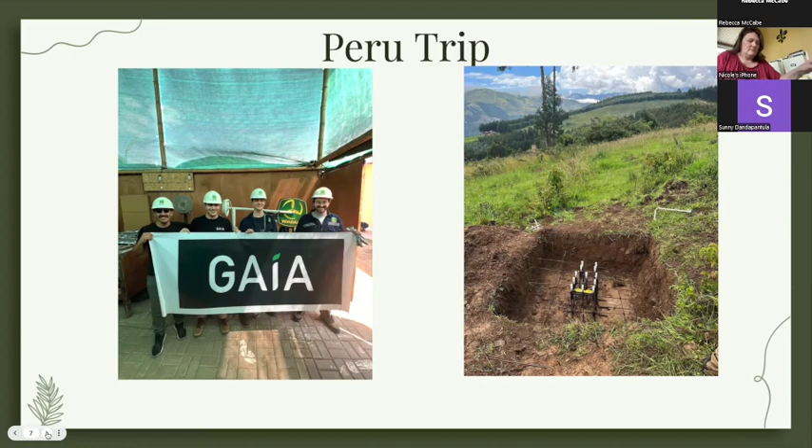And now we have reached today. We're at our first scaled in-person demo day. This has been a long time coming for us organizers, and we could not be more thrilled to be here today. Thank you to the GAIA organizers who made this possible, the ELP team of Miriam, Rob, and Erica, and of course, the competitors. We're so excited to hear about the solution you've created for this year's problem statement. That's it.

Okay. I think yours, because you have the rest of the stuff, I would say. Did you use this one at all, or is it just this one? Okay.

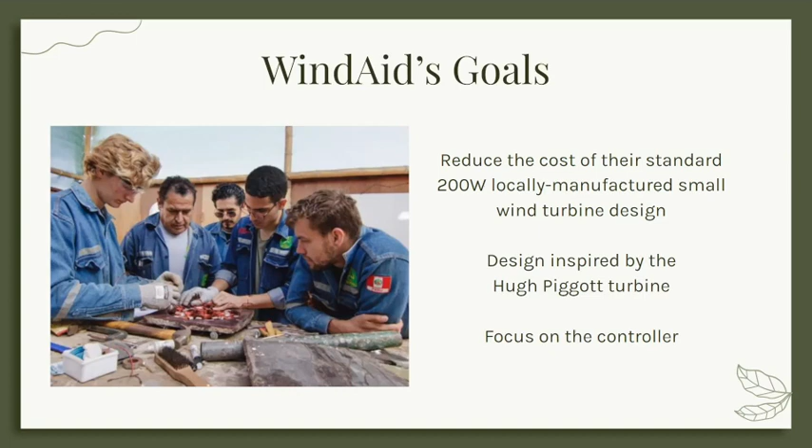They currently import their controller from a company in China, and the controller itself costs $100, but there's an additional $200 of shipping and tariffs and import taxes on that. That's a pretty major part of the overall turbine cost, and that is why the problem statement this year is focusing on how we can reduce the cost of the controller.

Diving into the problem statement, this is a document that the GAIA technical team creates each year to guide the competitors who are entering, with engineering functional requirements, design requirements, optimization objectives, and a wealth of technical resources and information. We created the objectives working closely with WindAid about what would be most impactful for them.

That is why the emphasis is more on cost reduction than it is on power improvement, because there is not going to be that much benefit to a small amount of power increase, whereas there would be a lot more benefit to cost reduction, because it would enable WindAid to make more turbines and give more people access to electricity who do not have it.

The requirements are derived both from physical constraints regarding the governing laws of all the subsystems, as well as the operational constraints and the operating environment — the operating environment of Peru in an outdoors location and needing to survive for many years.

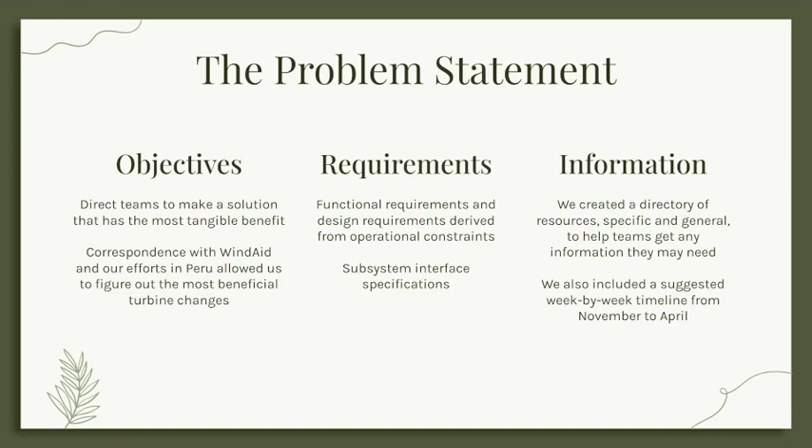The requirements also specify subsystem interfaces between the different components. Finally, the problem statement contains a compendium of resources intended to help teams get started, both introductory and complex and detailed technical modeling. We also included a week-by-week timeline.

This is a screenshot of the part of the design requirements portion of our problem statement. You can see that the electronic system was required because it was the main focus of WindAid for cost reduction, with optional subsystems of the blades and the generator, and several representative design and functional requirements.

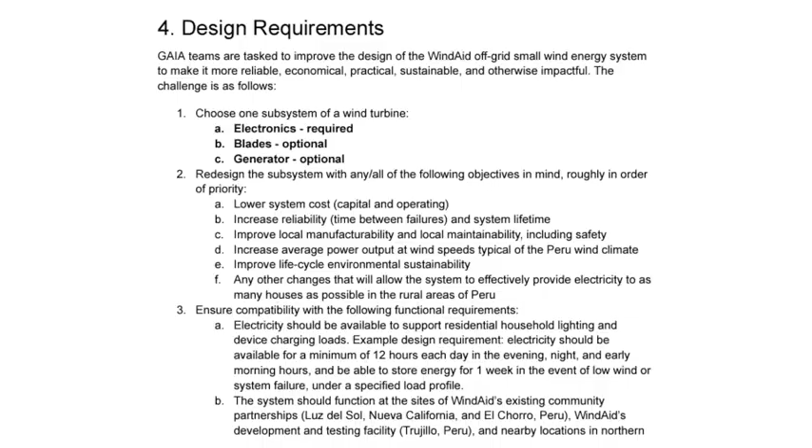This problem statement represents phase 1 of the entire GAIA program. The GAIA program has 3 total phases. This first phase is the prototype phase—a design, prototype, and test phase running through the school year, basically from September, culminating in this event in April, with the goal of innovating on the design, exploring, and testing the proof of concept.

The second phase is the pilot phase, or the implementation phase. This happens in the summer, and you'll hear more about that later on. This summer in August will be the implementation phase, where the entrants actually travel to Peru and implement their design.

The third phase of GAIA, which we have not yet realized with this inaugural cohort but where we eventually hope to get to, is scale—where year after year, the engineers can iterate on their design with continuous improvement, do monitoring and maintenance work of the turbine, and most importantly, scale the solution to have a broader reach and ultimately produce more impact, which is what GAIA is all about.

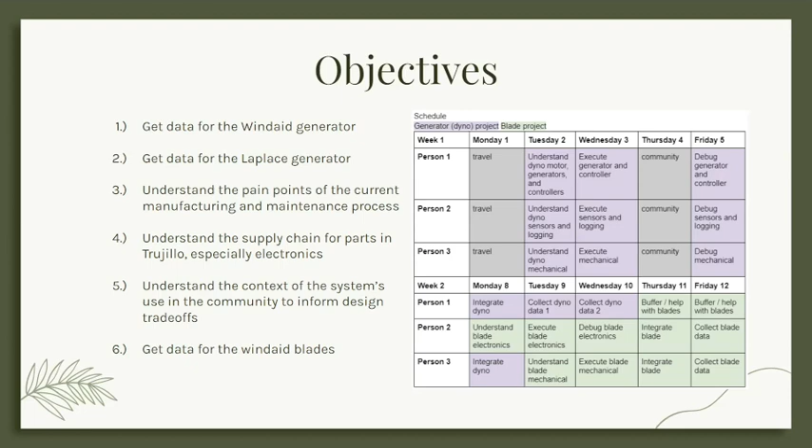Objectives 3 and 4 were about understanding the constraints relevant in Peru—related to the current manufacturing and maintenance process, so they can be improved with very specific recommendations in the problem statement, and also to understand supply chain, especially for electronics, as electronics are the main pieces that could not be locally sourced for the WindAid turbine so far. Fifth, understanding the context with the ultimate end users and their role in the community for better user-centered design. Finally, a reach goal was to also get data for the blades of the turbine.

And so that was our schedule. Great, this is playing.

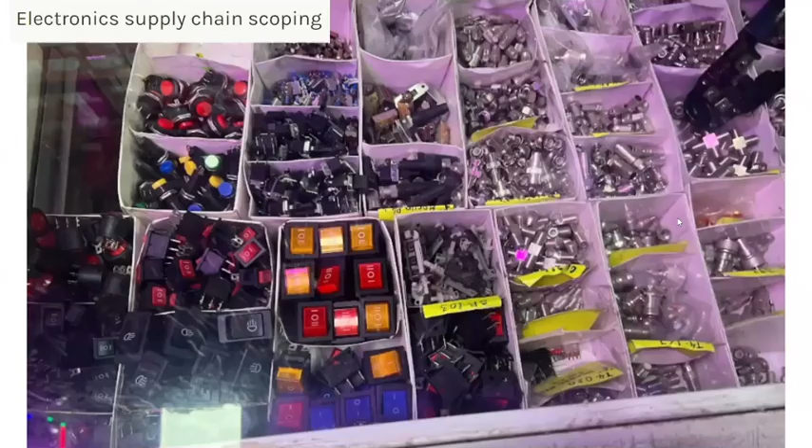Another goal of this trip was to do some electronic supply chain scoping. Here's a picture from YMYS Electronics Store in Trujillo, one of the electronic stores our team visited to get an idea of their inventory—the kinds of components that were available and the kinds that were not. This was really helpful to see that commodity components like these buttons and switches are quite available, but you won't necessarily find something with a specific part number or very specific specifications, as well as understanding the sensors that are available.

We detailed all of the findings from this January Peru trip in a report to give to WindAid, which will serve as documentation for ourselves as well as other people who work with WindAid in the future. The accomplishments include better understanding the supply chain and getting some valuable generator data, although we were not able to get all the generator data we were hoping for—that will be a future plan, and you can hear more about it in the generator technical presentation. We also did not have the opportunity to gather blade data for the aerodynamics.

All right, so I'll move on to generator modeling. This is another separate function that the technical team of the GAIA organizers works on. This was originally a portion of the problem statement for an additional team, but that team ended up not being able to participate this year. So in order to still have the most positive impact we can for WindAid, our technical team is also taking on this modeling project.

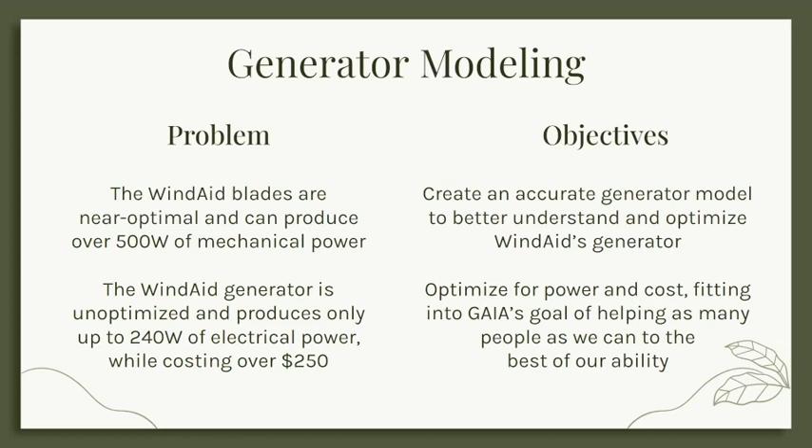Moving on to the next steps, another aspect of the technical team in the future will be to create a systems model. This will help unify all the different subsystems and will be used in our problem statement in future years as the direct measure of impact, by including a physics model that has aerodynamics, the generator, the controller, and the battery, with the objective to minimize the number of hours in a year where the battery has run out of charge.

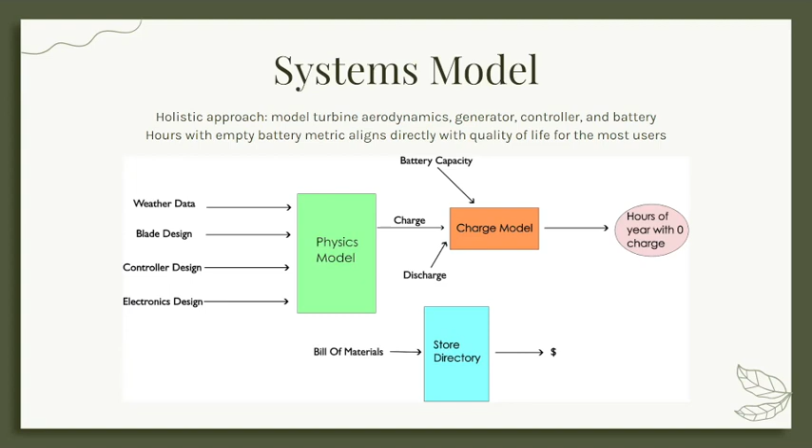Therefore the households do not have access to that electricity. That is a metric that aligns very well with the direct impact on people and their quality of life. This is why it's really important for us to make this systems model, to be able to say how an impact on an individual subsystem level will affect the overall goal of helping people have access to electricity who otherwise would not.

All right, so we will get started with the next technical presentation. This one, as I mentioned before, was originally included in the scope of the problem statement for another competitive team, the MIT team, but they were not able to finish the project. So the GAIA organizer team is completing this project, and we are excited to show you our model calculation and results for the WindAid generator.

So I will walk through the goals of this project and additionally some more technical details about the Peru trip that happened in January, where we aimed to characterize the existing generators. Then I will talk through the existing solutions in detail, go through our design process, our modeling as well as design optimization process, and then end with some future work for the generator system.

Starting off with the goals: as we mentioned in the previous presentation, the current WindAid generator has an efficiency of less than 50%, and it uses a pretty large amount of both magnetic material and copper. So we wanted to optimize the power efficiency, the economic efficiency, while maintaining the level of manufacturability with an emphasis on locally sourced components from Trujillo, Peru.

In particular, on the power efficiency side, we want to make sure the generator can match the amount of torque that the aerodynamics or blades are capable of producing. On the economic side, that's reducing the amount of magnetic material, which is, apart from the controller, the only other piece of the turbine that cannot be sourced from Trujillo. The magnets have to come from Lima currently, in addition to the copper, which is the biggest single cost component on the generator.

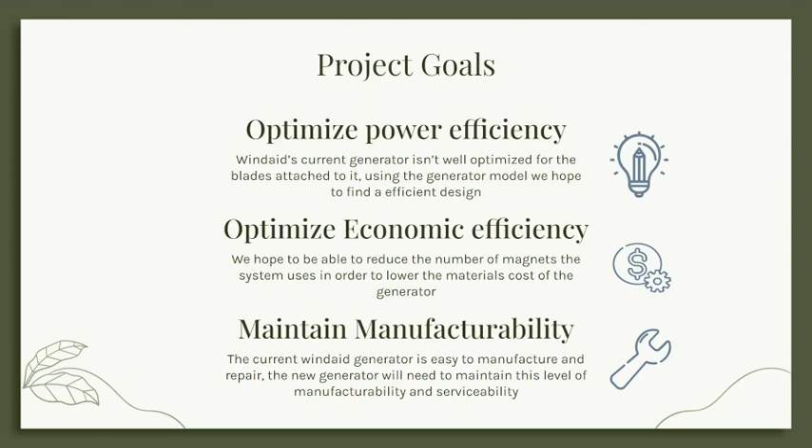That's an MPPT controller. The competitive team talked a little about this. It's a maximum power point tracking controller that basically ensures the optimal tip speed ratio, which is an aerodynamic parameter, is maintained on the turbine.

So what we wanted to do with this dynamometer setup is, by putting the motor and the generator together, you're able to load the generator. It's an alternative to spinning it with a drill, like we just saw the demonstration of, but being able to put a lot more power into it to see how it operates and obtain the entire torque-speed curve and efficiency map, meaning efficiency as a function of torque and speed.

Some secondary objectives that we had were to characterize the static parameters, for example the resistance and inductance of the winding, as well as the back EMF constant. Those are all parameters that we input into the model, which are necessary for benchmarking and validation purposes.

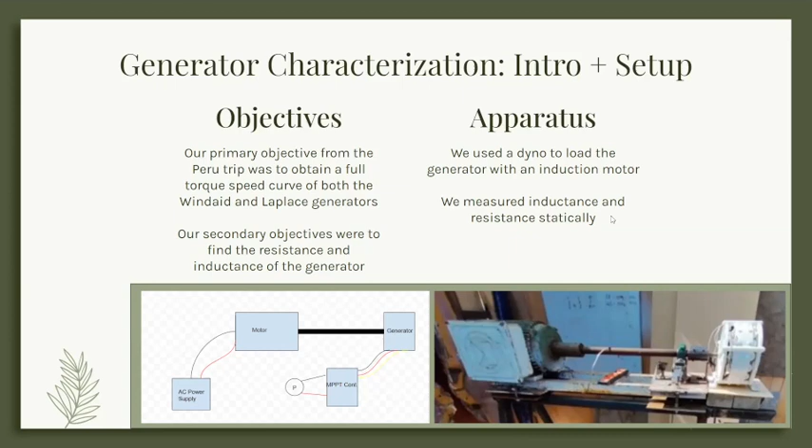That is both the resistance and the imaginary component, the inductance of the winding. These were helpful pieces of data we measured on the Laplace generator in Peru that we can now use for benchmarking and validation. Unfortunately, some other measurements were not able to be accomplished on that trip.

Namely, the piece of data we were most looking forward to gathering, the torque speed curve and efficiency map, we were not able to get. One reason that initially prevented us from getting this was that the capacitor in the MPPT controller we were using blew. Initially we were unsure why this was happening, but we were able to trace it back to the back EMF constant of the Laplace generator being too high.

What that means is that for a given rotational speed typical of what the wind might spin the turbine at, the voltage produced on the generator is too high, to a level that damages the controller. We measured more than 100 AC volts on the phase of the generator when the controller is designed to operate at a maximum of 48 volts. That resulted in a blown capacitor.

This is actually a really important learning point, because without this testing, we wouldn't have known that the back EMF constant of the Laplace generator was not suitable for the WindAid system -- basically not suitable to be used with a 12-volt battery system. This needs to be taken into account in the future when suggesting design considerations: even though the Laplace generator could theoretically produce twice the power, because its voltage was mismatched, in reality it was not able to be very effective, and it broke the controller.

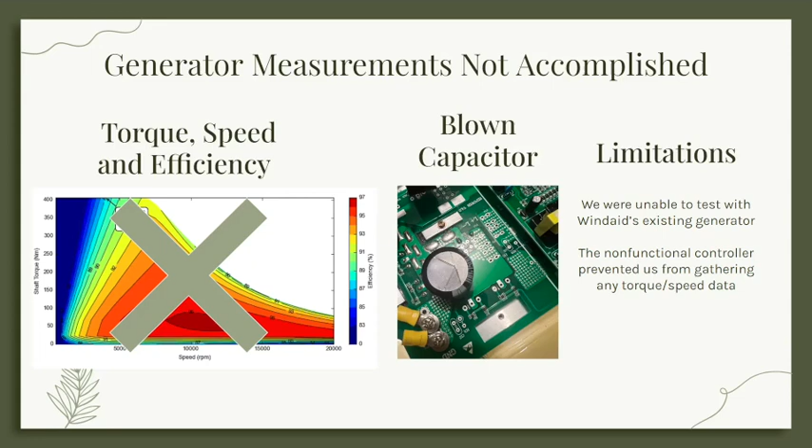So, existing solutions -- I mentioned the Laplace generator briefly, and I want to go more in depth on this generator and its assumptions, as well as other existing models, before diving into our own model. The most obvious existing solution is the standard generator design WindAid has been using for years, based off of the Hugh Piggott turbine design. It's an axial flux machine containing 8 magnets or 8 poles, wound by hand with copper coils, and the magnets are placed on a piece of steel.

There is also a zinc plating on the magnets used to protect them from corrosion. In some sense, you could lump that into the magnets, but it's broken out separately. Knowing this cost breakdown is helpful because it lets us know where it's most important to target cost reductions.

Mechanical cost reductions aren't very feasible, because those are all components that need to exist, none of the individual components are very expensive, and the amount of torque shouldn't change substantially since we still want to handle the full aerodynamic torque. That's why we're focusing on the magnets and copper as the two primary areas of cost reduction for the generator.

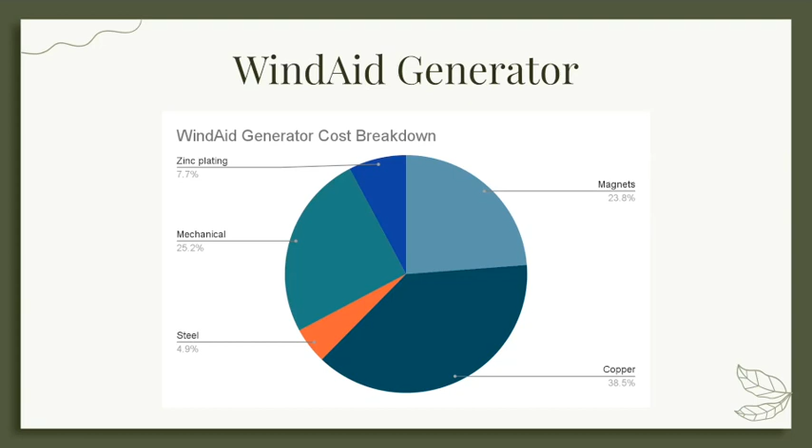To analyze this as an optimization, we need an electromagnetic model of the underlying equations so we can know, if we change some aspect of the design, what will be the effect on the overall operating parameters. The starting point we had for this electromagnetic model was created by an engineering senior design team at Dartmouth about 6 years ago.

We call this the Dartmouth model. They had a model that includes finite element analysis using the FEMM, or finite element method magnetics, package. It also includes the aerodynamics.

Basically, they input a curve for the blades, CP versus lambda — that's coefficient of performance versus tip speed ratio — and combine that with a more detailed electromagnetic model.

They were able to validate this model by taking a couple of experimental data points with a passive rectifier in their shop. So it's helpful as a baseline.

However, there are many drawbacks to the Dartmouth model that we found as we looked more into it. One that was glaring to us was a factor of 4 error in the power caused by swapping the diameter of the blades with the radius of the blades.

This meant that right off the bat, none of the conclusions could really be trusted, although that is a very simple thing to fix in the model.

As we dug even further into it, we found that the torque versus speed curve used did not seem to align with our expectations.

Part of that is they're assuming passive rectification only — basically a diode rectifier — and not an active controller. This can change the torque speed curve.

Until very recently, we were not aware of that distinction between the different shapes of torque speed curves depending on the type of rectification. We're learning more about that in this modeling process, and we'll hopefully be able to better evaluate exactly how to tweak the Dartmouth model to take that into account.

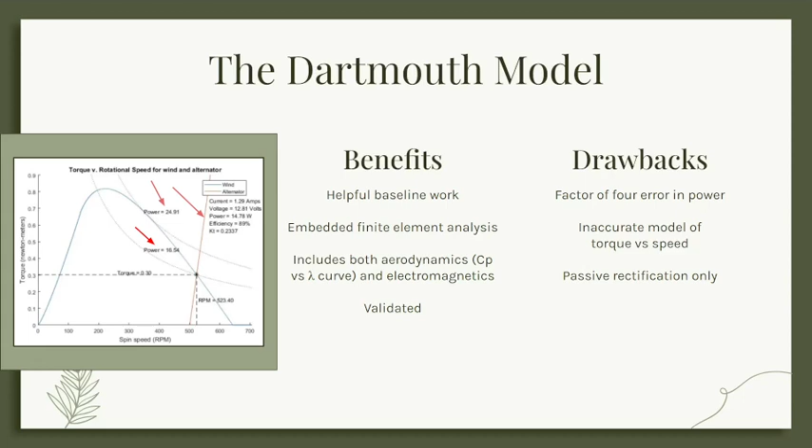We determined that this model, while helpful as a baseline, needed a lot more work and further investigation before we could use it to make decisions to suggest for a WindAid generator.

The second existing piece of work we had to go off of for the generator was the Laplace generator. Laplace Laboratories is, I believe, a national lab located in France, and they worked with WindAid to design a new generator, hoping to address the drawbacks of the standard WindAid design.

Their generator is pictured there — one 3D printed version in white, and one manufactured using realistic, locally sourced materials, like a composite, on the right.

The benefits of the Laplace generator: they use larger, stronger magnets. The original WindAid design used N42 strength magnets, whereas the Laplace generator uses N52 strength neodymium magnets — basically the strongest there is. There's also a substantially reduced air gap, meaning you can get the magnet and the coils a lot closer together.

That increases the magnetic field through the air gap, which is one of the most important operating parameters for the torque of the system. Because of those design changes, the theoretical capability of the Laplace generator is it can handle more than twice the power of the WindAid generator. This is useful because it would allow operation of the entire torque speed curve that is aerodynamically possible, so we would no longer be generator limited.

However, the biggest drawback with the Laplace generator is something we found on the January Peru trip: the back EMF constant is way too high. At typical wind speeds, it would be producing 70 volts and is incompatible with most commercially available controllers. That's a pretty major problem that will prevent even integration and testing of this device.

We are hoping to have a little more insight and discussion with the Laplace team in the future about whether this was a calculation error on their part, a misunderstanding of requirements, or where this discrepancy might have come from. Another interesting fact about the Laplace generator is that it does not use steel, which is rather strange.

As we saw a couple slides ago, the cost of steel in the WindAid turbine right now is less than 5% of the total cost. Steel is not a particularly rare raw material in the context of Peru, but the Laplace report that we read basically said the designers wanted to minimize and eliminate the use of steel.

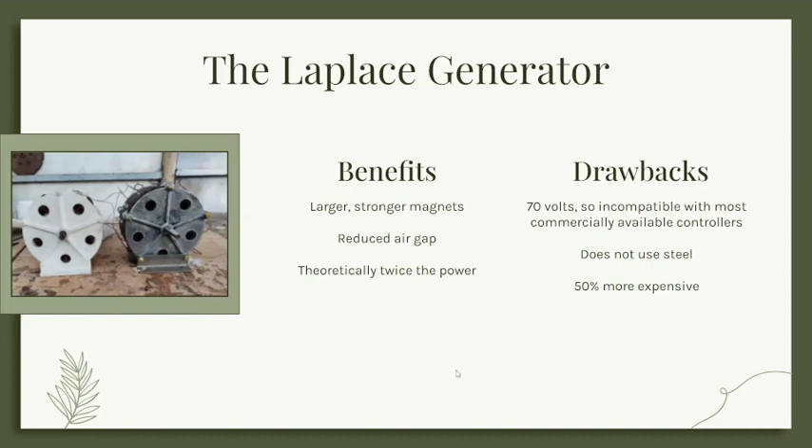We were hoping to learn from the drawbacks of each of these previous design processes and models to synthesize a recommended generator design that we could recommend to WindAid for the future. On the physics side, we looked at the coil, magnet, air gap, and steel.

With the coil, on most standard motors in machinery, they are wound using a machine, which gives them a lot more flexibility in their winding design. However, because being locally manufactured is a really big priority for WindAid, their coils are wound by hand using a machine with a crank on it. That places constraints on the dimensions, the number of turns, and the wire gauge that can reasonably be used.

The coil does not affect cost very much, because the gauge of wire doesn't cost that much differently between gauges, but it is a substantial contributor to cost through the overall amount of copper that is used. So in that sense, the coils do play an important role.

On the air gap side, we already talked about how minimizing the air gap will increase the magnetic field through the air gap and therefore increase the torque of the machine, which leads to more power. However, on the flip side, having such a small air gap is a tolerance issue, which decreases the manufacturability.

This is a constraint that requires a little more discussion and back and forth with WindAid about what level of tolerance is realistic in their workshop, given their manufacturing techniques, that would allow us to go down to a smaller air gap. And then additionally, the magnet properties.

The big difference between the WindAid generator and the Laplace generator was the number, size, and strength of the magnets. Our model accounts for all of these things.

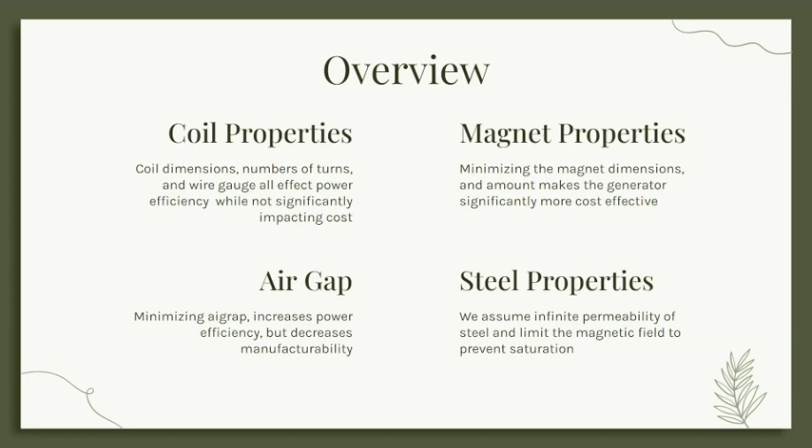And then finally, the steel. We model steel in our electromagnetic model as an infinite permeability material, which is a bit of an ideal assumption. But to mitigate the effect of this, we limit the magnetic field through the steel to prevent saturation in it.

And so with this physics-based simulation that we're able to build, we can test a whole bunch of different combinations, and ultimately we need some selection criteria. How are we going to decide from all the different possible generator designs which one we recommend?

The criteria we ended up using is minimizing two different objectives, the mass of magnets and the mass of copper, because those were the two big cost contributors that are able to be changed by the design of the generator. And then a constraint of this process is that we need sufficient torque to basically allow as much torque as the aerodynamics of the blades are able to provide, up to a maximum wind speed of 10 meters per second, which is the largest typical wind speed in this part of Peru.

Given this selection criteria, we're able to incorporate the power efficiency with that constraint, basically enforcing the torque speed curve of the motor is always above what the blades can provide. And we use the coefficient of performance versus tip speed ratio curve, which ensures that there's no power left on the table, so to speak.

And then on the cost efficiency side, that's where the minimizing magnet and copper mass comes in. By hopefully reducing the cost of the generator, it will allow WindAid to produce more turbines. And of course, keeping the voltage low. We just basically include the DC voltage of 12 volts as a parameter in the optimization, so it's not even needed as a constraint. And finally, for manufacturability, we filter the designs based on achievable air gap and number of turns. Those are currently just estimates that can be refined once we have further discussions about the manufacturability with WindAid.

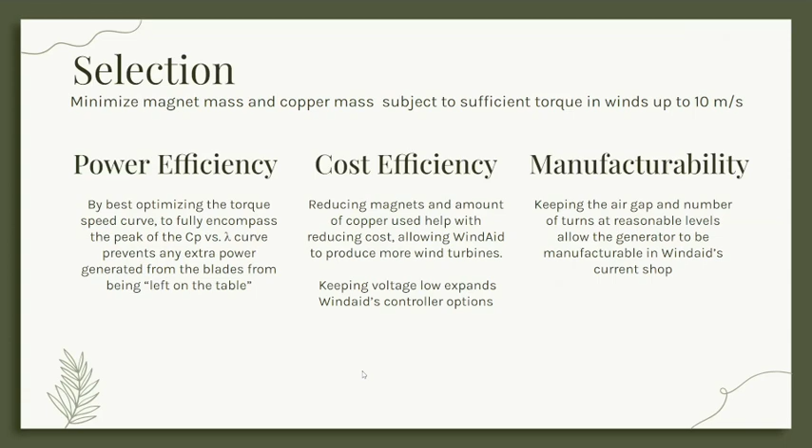So now I'll talk about the exact physics details of the model. We have both a radial flux model and an axial flux model. These are two different types of generators or motors. Both of them are permanent magnet synchronous machines, but the direction of the flux of the magnetic field differs, basically whether it is radial or axial, as the names would suggest.

And because it is all analytical, this means that it's able to run really fast. There's no numerical computation or nonlinear equation solving that is required. And we're able to maintain some level of nonlinearity by using Fourier analysis. This basically decomposes a waveform into the fundamental and its higher harmonics, and we can see the effect and how much the motor diverges from the ideal sinusoidal motor.

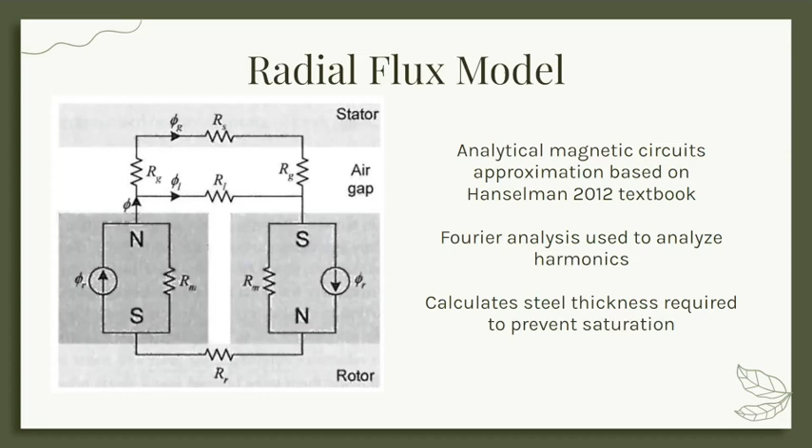And with the steel, we calculate the thickness required to prevent saturation. So the steel thickness is not a design variable, it's an output.

And I'll contrast this with the axial flux model. Windaid's existing machine is an axial flux machine, and therefore the Dartmouth model already has implemented an axial flux model that uses FEA, finite element analysis. This is a more complex form of analysis. It lets you get greater detail, but it takes longer time.

Some more detail: it gives you a more detailed spatial resolution of the flux. You can see from this image, for example, how the flux paths go from magnet to magnet and then through the steel, and it also includes real material parameters. So we're not assuming infinite permeability of the steel for this - the steel has some finite permeability in its material parameters.

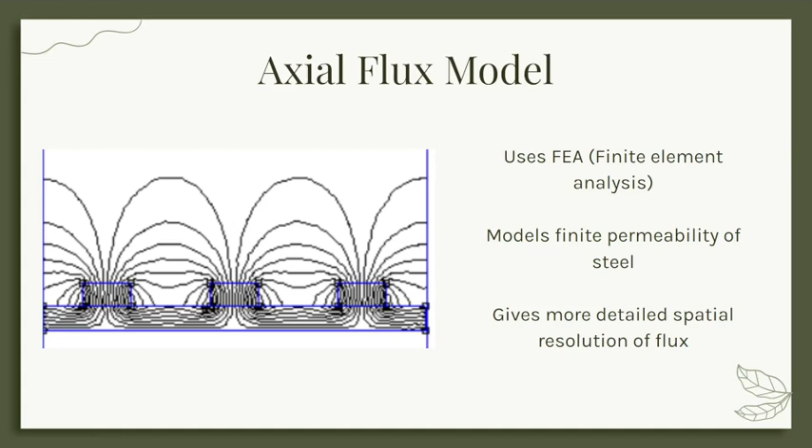So the bare bones of the Dartmouth model, we're still able to use the way it sets up this finite element analysis in the FEM software. But the main things that we're modifying are, after it computes this, what do you do with the magnetic field to get the torque speed curve and the power? Those are the main things that we are changing.

And so this is a piece - the systems model that I mentioned before is not created yet, but ultimately, instead of assuming that the generator needs to produce as much torque as aerodynamically possible, in the future, for example, it might make sense to have a co-optimization between the aerodynamics and the blade design and the generator design, or even just look at what would happen.

Is it worthwhile to have a smaller generator that does not quite get the maximum aerodynamic torque, but still gets plenty? For this type of analysis, we would integrate the systems model, which consists of the physics model of all the different disciplines, as well as a battery charge model, to ultimately give us the metric of how many hours per year the family using the wind turbine does not have access to electricity because their battery is dead. That will be an alternate objective in the future.

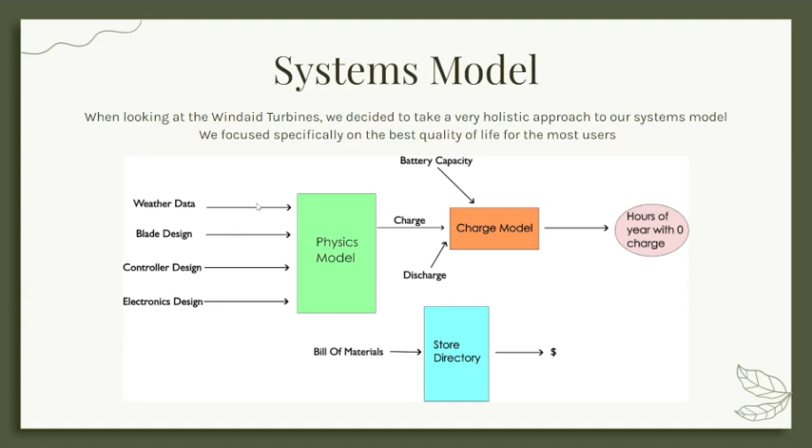Some detail on the systems model: we have interaction between the torque and speed of the aerodynamics and the torque and speed of the generator. The aerodynamic curves are shown in orange and pink. This comes from the coefficient of performance versus lambda curve, scaled appropriately to find the aerodynamic torque and speed. Then the generator torque and speed capability is overlaid on that, and we can find the feasible operating regimes of these combined constraints.

Given the overlap of these curves, we transform that into a mechanical power as a function of wind speed curve, which can then be used to look up, based on the wind speed over time from hourly weather data, the average mechanical power. We run that through the efficiency to get the average electrical power, and that goes through the battery model to charge our model battery and determine how many hours a year the battery is empty.

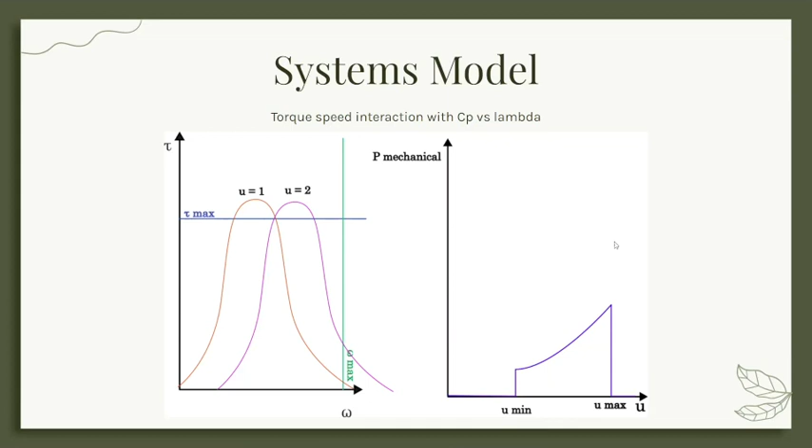Here are some results of running this model. The rotor is shown in black and the stator in red. The optimal generator output of this optimization currently contains 15 slots and 10 poles. It can produce 8 Newton meters peak, has a top speed of around 1700 RPM, and weighs 4 kilograms. You can also see the torque speed curve there.

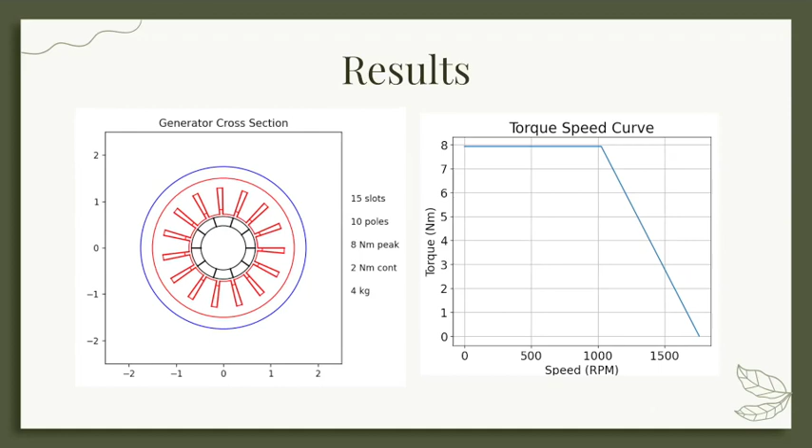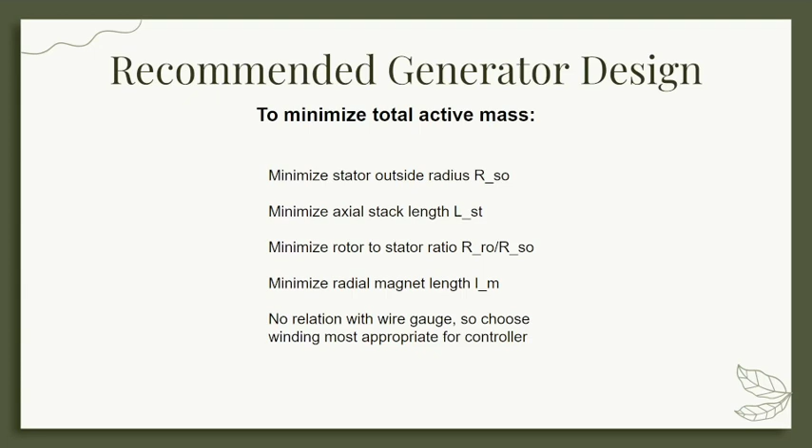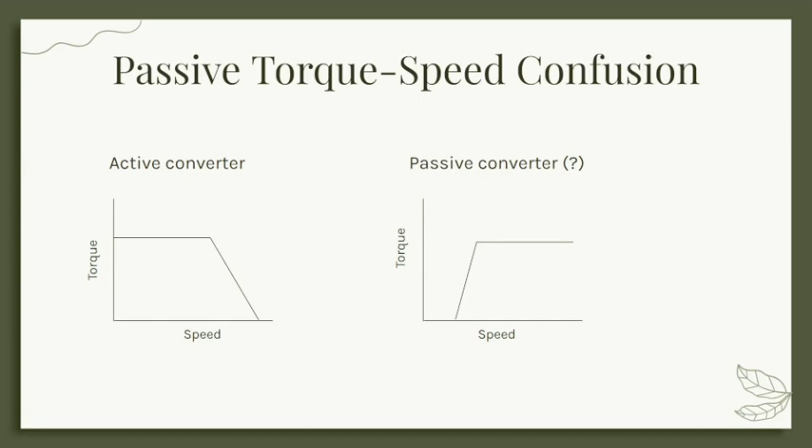An additional thing we'll be doing for this project going forward is resolving some confusion that recently came up about what the torque speed curve looks like for different types of rectifiers—active versus passive. The active converter is what you'd very standardly see as the torque speed curve of a motor or generator, with pretty flat torque dominated by thermals and current limited, followed at higher speeds by a linear slope down that is voltage limited, imposed because there's a fixed amount of voltage available from the converter.

So right now, Nico is going to spin a drill that will spin the generator. Once he spins it fast enough, there will be wattage output on this controller's monitor. I'm going to press this button and it's going to show the wattage, which is the amount of power going to the battery. As you can see on the symbol here, it's from the generator going to the battery, so the battery is charging.

Can you hold it the other way? This way, or this way? Yep, okay. You can also observe the voltage readings here from the rectifier outputs. So I guess we should spin it. Okay, I'm going to set it. Okay, we're ready.

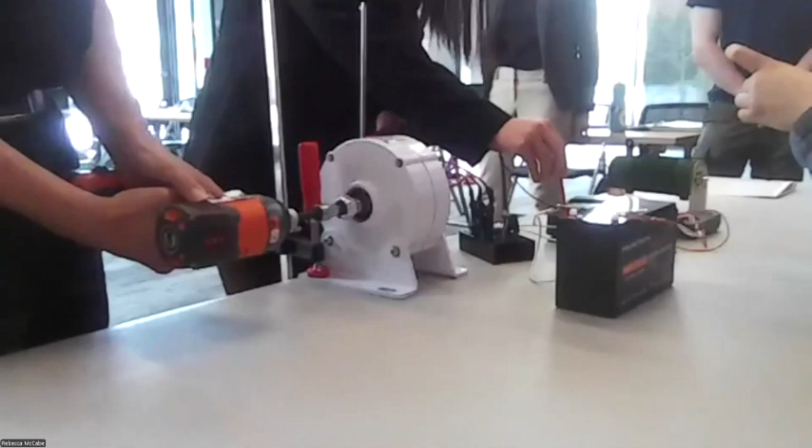You can see there was a little bit of wattage output on this. Let's spin it faster again. Yes, and you got 18 watts here, and you can see we're staying within the range of 55 volts, still under 42 watts right now. Okay, that was good.

You want to get a picture with everyone standing in front of the demo? That would be nice.

Of the mission by empowering college teams to go through the entire design process: conception, design, prototyping, and execution of these solutions for global sustainability. I'm really proud of the Cornell competitor team who has been able to get all the way here as the first GAIA team to really engage in a demo day and be able to have a solution to the problem statement. It's really exciting, and I hope we're able to continue empowering this team and other teams to have the same sort of impact.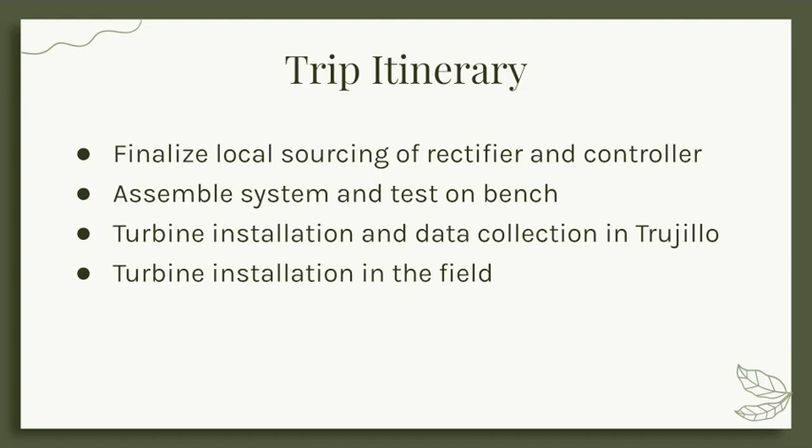And then our plans for next year: we will be updating the problem statement based on all that we learned from this year. This year, the projects executed were the controller getting all the way to the prototype stage, and the generator only reaching the modeling stage.

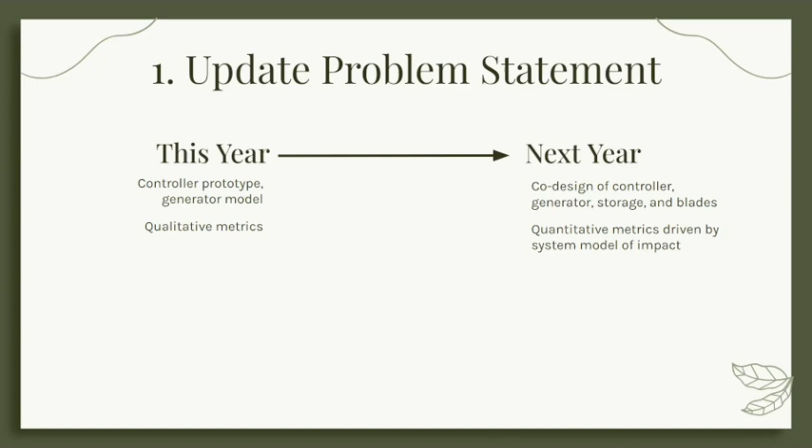This year used qualitative metrics in the problem statement. Next year, we're hoping that by continuing to work with Wind Aid, we'll be able to refine this even more to enable the co-design of different subsystems, including the controller, generator, energy storage like battery, and the blades. Finally, leveraging the system model we've been planning, we want the problem statement to be based around quantitative metrics so design decisions can be made in a more logical and goal-oriented way—that's the goal for next year.

A second goal for next year is to validate GAIA's operational model. I'll talk about three different aspects of GAIA's operational model and where we are on that.

As you know, GAIA is a relatively new organization. One of the first hypotheses we posited was that college engineering students are a source of untapped potential for making impact—hypothesizing that college students, being eager to gain experience, are willing to devote more time and energy than, for example, working engineers who would volunteer after hours. Colleges are a great place to have this impact because they offer monetary resources for prototyping and travel, as well as technical guidance from mentors, professors, and even peers and classmates.

Finally, there's a gap in this operational model, a gap in this paradigm of impact for college engineers. Most existing engineering programs either focus on rigorous engineering or on the global sustainability context, with pretty limited opportunities to do both. That's what GAIA is aiming to be—the intersection of rigorous engineering applied in a global sustainability context, using that to make the most impact possible. So far we have not observed any evidence that would negate this hypothesis, and it's still something we'll be refining in the coming year.

The second piece of GAIA's operational model that we can validate next year, once we finally have this first demo day under our belt, is the structure of how GAIA works. We hypothesized that the best way to activate the untapped potential of college engineers for impact is to organize a yearly competition. Our motivation is that students are really motivated by either competing or by learning.

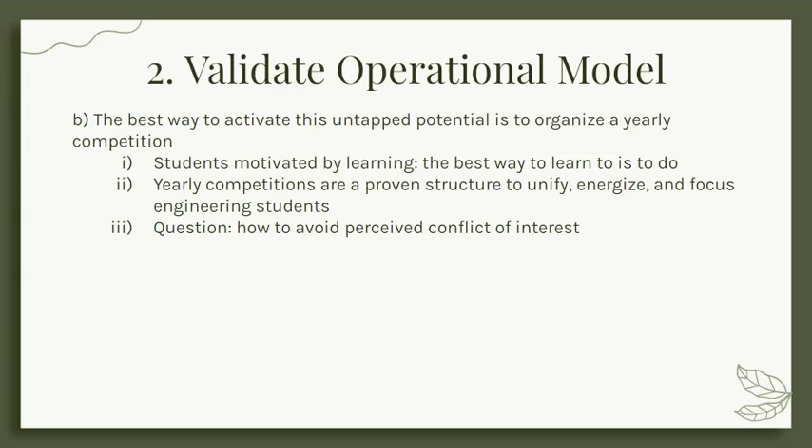We've previously done this with some site visits to the MIT team earlier this year. We'll have to explore what that looks like as GAIA's scope grows, and whether that's feasible, or if there are other operational ways to do this.

A third piece of GAIA's operational model that we hope to validate in the upcoming year is our detailed way of operating. We hypothesize that new teams can successfully make progress on the problem statement when provided with technical resources, a suggested timeline, and weekly office hours.

This hypothesis has been the one we've struggled with most as an organization. As you're probably aware, we no longer have the MIT team competing with us, and there were other teams interested at the beginning who never really started on the project. Now that we have a competitive team who has really gotten through it, we're hoping to talk more with you about how the experience was and how it can be made better in the future.

We're looking at providing more support in addition to the technical side, on the leadership and operations side, or whether to prioritize making sure competitor teams have an experienced engineer on the team who can guide on the technical side, or even exploring mature organizational structures that wouldn't require building an organization from scratch, like senior design projects or existing project teams. GAIA's organizers will be considering all of these, and we're eager to make these operations as good as possible for the success of teams and to enable the most impact.

An additional plan for the coming year would be to potentially expand to other competitors. These are schools who have previously shown interest in GAIA, or schools we have potential connections to. We'll be deciding over the summer the exact scope of how many competitive teams we're aiming to have next year, trying to balance the amount of impact with breadth, as well as the depth of support we're able to give each team.